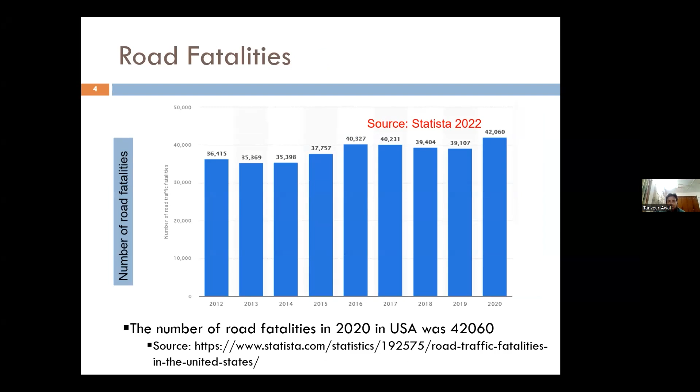The figure in the slide shows the number of road fatalities in the USA from 2012 to 2020. For example, the number of road fatalities in 2020 in the USA was 42,060. Now I shall present some relevant statistics in case of Bangladesh. Due to traffic jams, around 19 million working hours are being lost daily in Bangladesh. 6 to 10% of the country's GDP is lost every year. The number of road fatalities in January 2023 in Bangladesh was 333 in 322 accidents.

A potential solution for traffic congestion and road fatalities is intelligent transport systems with autonomous vehicles. The goal is to attain efficient and safe road traffic, as well as achieving comfort of the passengers. Important aspects related to ITS are car following, lane changing, merging, etc., and fault tolerance.

Now, some background of car following models. Most of the car following models assume that the dynamics of the follower N is controlled exclusively by the dynamics of the leading vehicle N-1. The most significant variables in the description of vehicle dynamics are leader speed, follower speed, and gap.

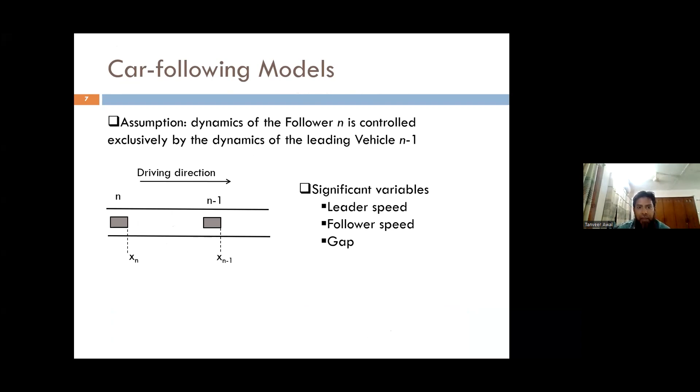Now I shall present the applications of car following models. Car following models can be used to control the real-time longitudinal interaction among driverless vehicles. They are used in advanced vehicle control and safety systems, such as adaptive cruise control, collision warning, and lane guidance, and in modeling simulation of safety studies and capacity analysis.

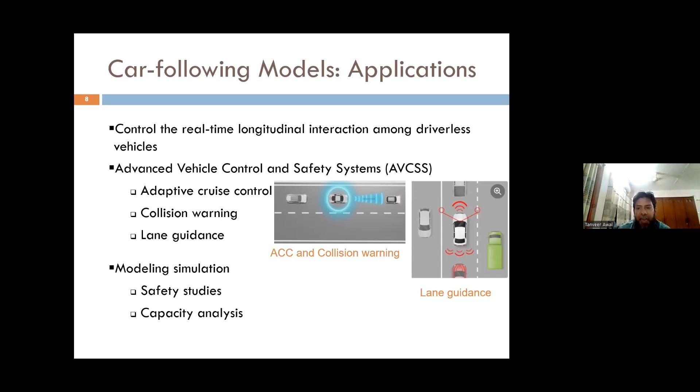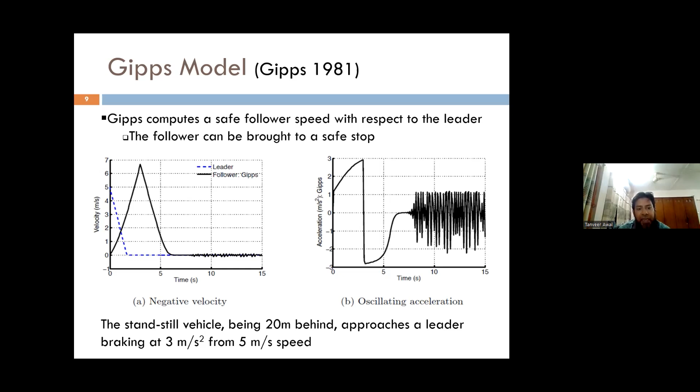Gipps model, proposed by Gipps in 1981, computes a safe follower speed with respect to the leader, assuming that the follower can be brought to a safe stop if the leader comes to a sudden stop. However, this model produces negative velocity and oscillating acceleration, as shown in the figure in the slides. For example, in the scenario where the standstill vehicle being 20 meters behind approaches the leader braking at 3 meters per second square from 5 meters per second speed.

Intelligent driver model IDM assumes that the follower acceleration is a function of own velocity, gap, and approach rate. However, IDM also produces negative velocity. For example, IDM shows unrealistic negative velocities where the standstill vehicle being 20 meters behind approaches a leader at rest.

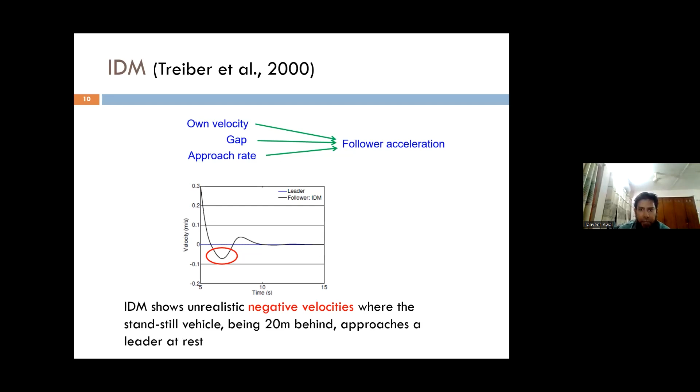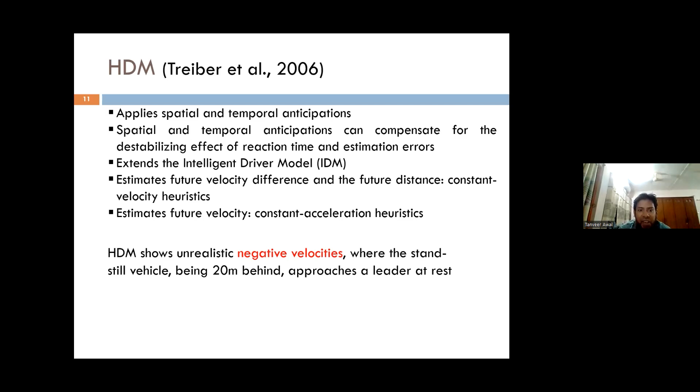Now I shall present human driver model HDM. HDM applies spatial and temporal anticipations, which can compensate for the destabilizing effect of reaction time and estimation errors. It extends the intelligent driver model, and estimates future velocity difference and the future distance assuming constant velocity heuristics. It estimates future velocity assuming constant acceleration heuristics. However, HDM shows unrealistic negative velocities when the standstill vehicle being 20 meters behind approaches a leader at rest.

Now I shall present space-based models SBM proposed by Bevrani et al. Under a certain short distance, the driver feels unsafe and tries to avoid collision. In further distances, the driver tries to achieve a similar speed to the leader up to the parallel adaptation distance. Beyond the parallel adaptation distance, in the attraction zone, the driver tries to catch up with the leader with the desired speed.

Now I shall present the motivations. Car following models depend on sensor measured values. In reality, sensor measurements are inaccurate and erroneous. For example, GPS receiver errors occur due to signal blockage and multipath effect. Radar sensor errors occur due to hardware malfunctions, road curves, grades, etc.

Radar sensor error has an error value in the range plus minus 0.38 meter. Global positioning system GPS receivers have a position error in the range of plus minus 10 meter. However, there is no research work that conducts fault tolerance analysis of the car following models in presence of sensor errors.

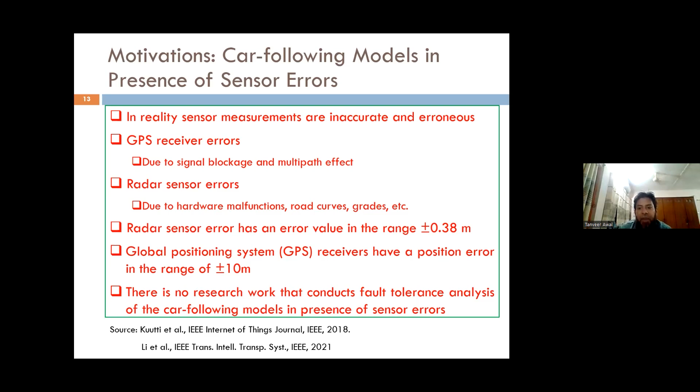Now I shall present the objectives and outcomes of my PhD. The first objective is to conduct a fault tolerance analysis of car following models for communication enabled autonomous vehicles under imperfect sensor information. The outcome is a quantitative fault tolerance analysis of car following models for communication enabled autonomous vehicles.

The second objective is to develop a methodology for escalating fault tolerance level of a prominent car following model for communication enabled autonomous vehicles. The outcome is a new methodology for escalating fault tolerance level of a prominent car following model KFTM for communication enabled autonomous vehicles.

The third objective is to simulate and evaluate the performance of the developed fault tolerant car following model for communication enabled autonomous vehicles in the presence of imperfect sensor information. The outcomes are simulation and evaluation of the performance of the developed fault tolerant car following model for communication enabled autonomous vehicles.

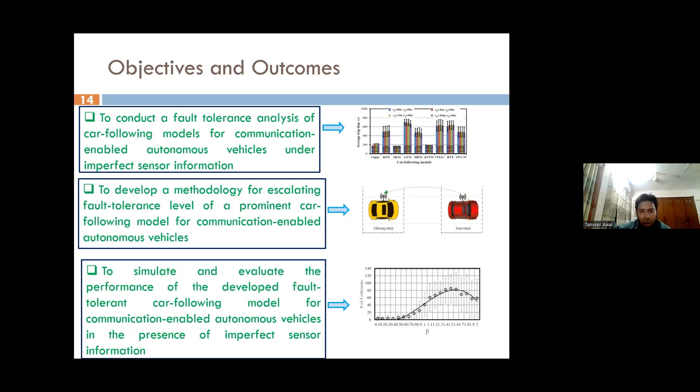The fourth objective is to develop model agnostic strategies for escalating fault tolerance levels of car following models for communication enabled autonomous vehicles. The outcomes are fault tolerant model agnostic strategies for escalating fault tolerance levels of car following models for communication enabled autonomous vehicles.

The fifth and final objective is to simulate and evaluate the performance of the developed model agnostic fault tolerance strategies of car following models for communication enabled autonomous vehicles in the presence of imperfect sensor information. The outcomes are simulation and evaluation of the performance of the developed model agnostic fault tolerance strategies of car following models for communication enabled autonomous vehicles.

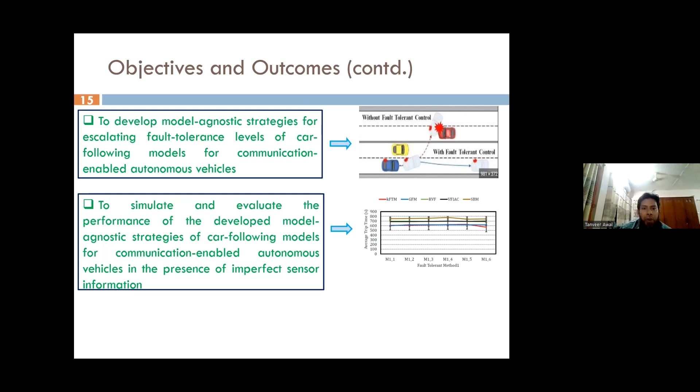In relation to our objective one, the car following models that we work with are as follows. We work with 9 car following models: Gipps model, Krauss model SKM, generalized force model GFM, intelligent driver model IDM, human driver model HDM, K leader fuel efficient traffic model KFTM, velocity fluctuation of the immediately ahead car VFIAC model, relative velocity fluctuation RVF model, optimal velocity changes with memory OVCM model.

Now I shall present the simulation setup in relation to objective one. The acceleration decelerations of the models are kept similar. The simulations are open system. Update time interval is 0.1 second. Inflow at the upstream boundary is either Poisson distributed or constant over time. Simulation length is 1200 seconds. Road length is 4 kilometers. We have implemented virtual detectors at the traffic light. Signal period is 40 seconds.

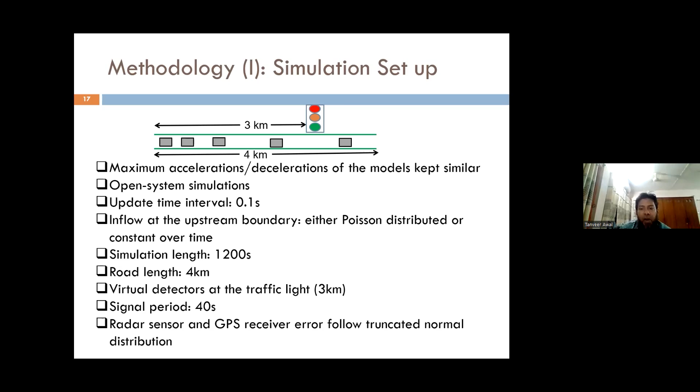Radar sensor and GPS receiver error follow truncated normal distribution. In our simulations, we use a part of a real highway map from Dhaka to Mymensingh. The distance between source and destination is 4 kilometers. The performance measures are safety, average trip time, number of cars finishing trips, average fuel consumption.

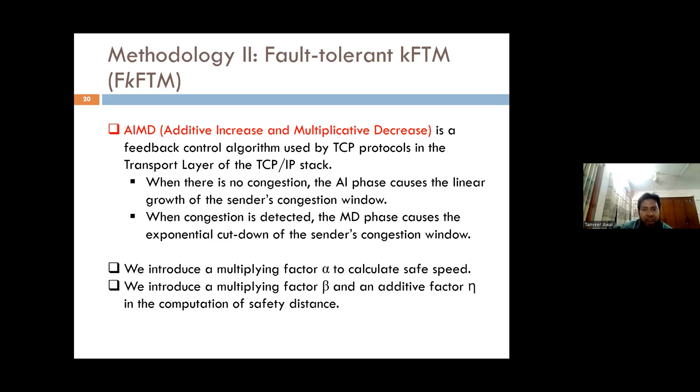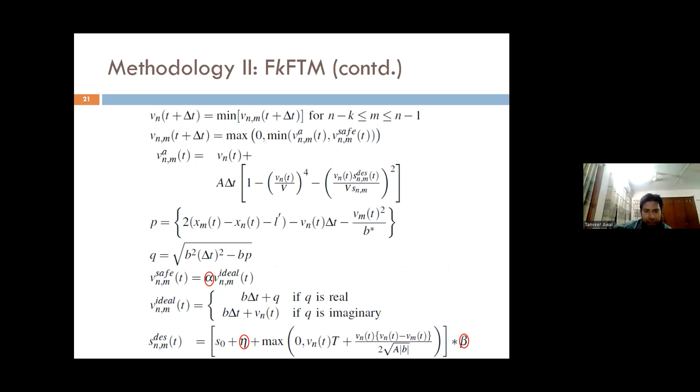We shall now propose a fault-tolerant car following model FKFTM based on KFTM. Inspired by the AIMD, additive increase and multiplicative decrease algorithm, we introduce a multiplying factor alpha to calculate safe speed in KFTM. We introduce a multiplying factor beta and an additive factor eta in the computation of safety distance. The formulation of fault-tolerant KFTM or FKFTM is shown in the slide. The introduced additive and multiplicative factors are circled in red in the slide. Alpha, beta, and eta.

Now the simulation setup in relation to objective 3. Simulations are open system. Update time interval is 0.1 second. Inflow at the upstream boundary is constant over time. We have also employed Poisson distribution, but for Poisson distribution there are no collisions. Hence we deal with only constant inflow at the upstream boundary. Simulation length is 1200 seconds. Road length is 4 kilometers. Signal period is 40 seconds.

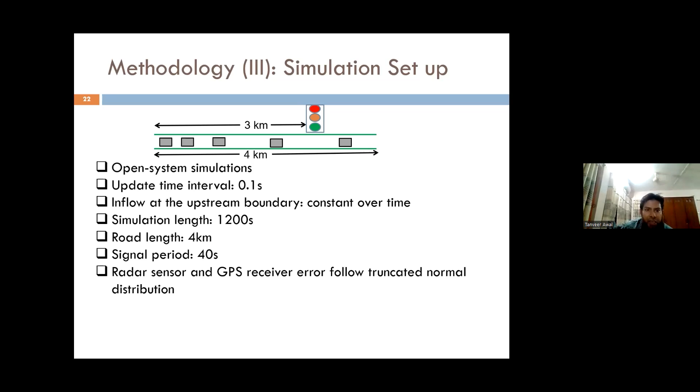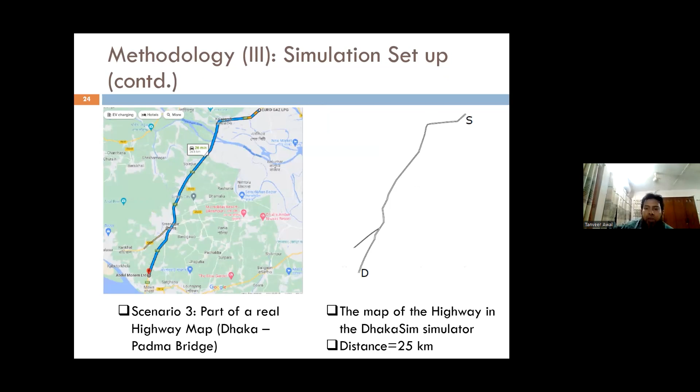Radar sensor and GPS receiver error follow truncated normal distribution. In our simulations, we use part of a real highway map from Dhaka to Mymensingh. The distance between source and destination is 4 kilometers. We also use in our simulations a part of a real highway map from Dhaka to Padma Bridge. The distance between source and destination is 25 kilometers in this case. For the simulation, the performance measures are safety, number of collisions, average trip time, number of cars finishing trips, average fuel consumption.

I shall now present the fault-tolerant strategies for car following models. Because the proposed FKFTM cannot nullify number of collisions, we propose 3 fault-tolerant strategies. Strategy 1 is fault tolerance through multiple sensor readings. The readings containing the safest GPS and radar sensor values will be used.

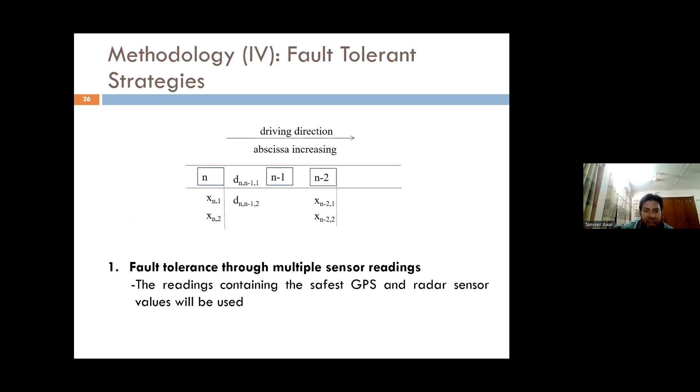Strategy 2 is fault tolerance through range of sensor errors. We have used different percentages of the maximum positional and gap errors in the calculation of the gap between adjacent vehicles. Strategy 3 is fault tolerance through multiple sensor readings and range of sensor errors. Both multiple sensor readings and percentages of the error ranges will be blended together in determining the gap between adjacent vehicles.

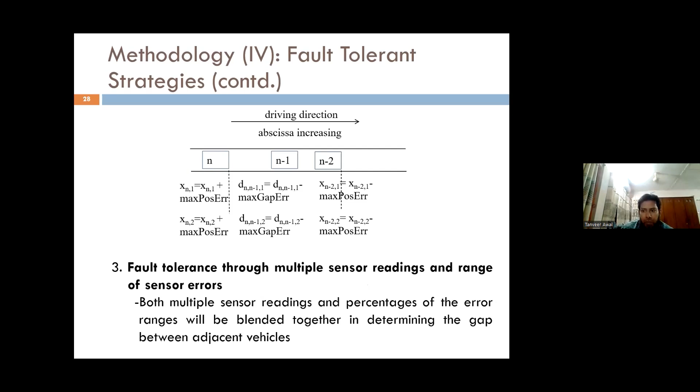In relation to method in our objective 5, we have worked with 5 car following models. They are generalized force model GFM, K-liter fuel efficient traffic model KFTM, velocity fluctuation of the immediately ahead car VFIAC model, relative velocity fluctuation RVF model, and space-based model SBM. The performance measures in this case are safety, number of collisions, average trip time, number of cars finishing trips, and average fuel consumption.

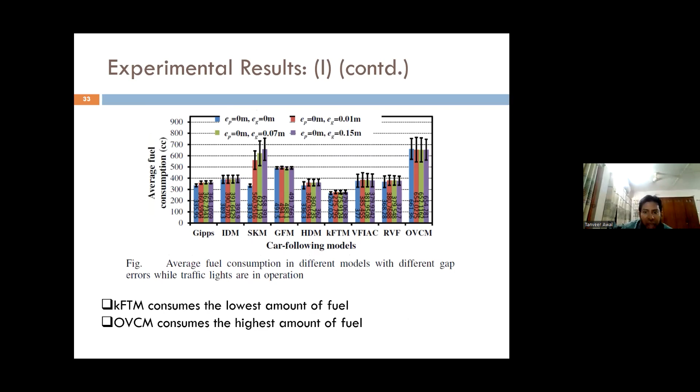The figure in the slide shows average fuel consumption in different models with different gap errors while traffic lights are in operation. KFTM consumes the lowest amount of fuel. OVCM consumes the highest amount of fuel.

Now I shall summarize the experimental results. Gipps, IDM, HDM, GFM, VFIAC, RVF, and OVCM can produce negative velocity. With traffic lights, sensor errors increase trip times and fuel consumption in Gipps, SKM, HDM, VFIAC, and RVF, while they have almost no impact on trip times in KFTM. KFTM is the most fault-tolerant model among the models under study.

None of the models is highly fault-tolerant. All models produce traffic light violations and collisions when traffic lights are in operation because they do not adopt any measure for fault-tolerant operations.

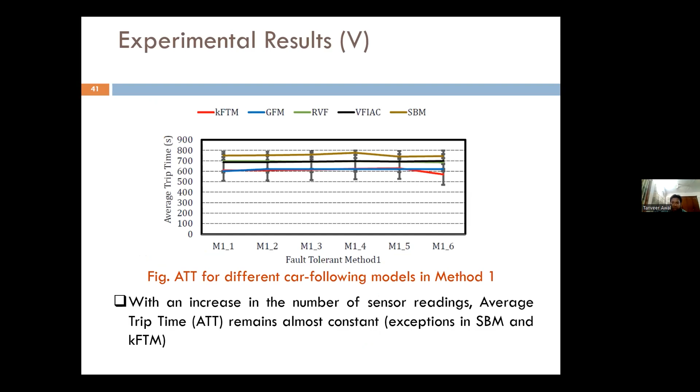Now we shall present the experimental results in relation to our objective 5. The figure in the slide shows average trip time for different car following models in method 1. With an increase in the number of sensor readings, average trip time remains almost constant. However, there are exceptions in SBM and KFTM.

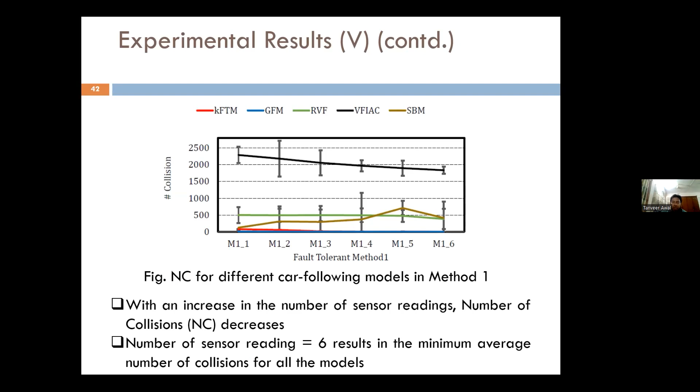The figure in the slide shows number of collisions for different car following models in method 1. With an increase in the number of sensor readings, number of collisions decreases. Number of sensor readings equal to 6 results in the minimum average number of collisions for all the models.

I shall now conclude with the contributions in this thesis. We have done a fault tolerance analysis of car following models for communication-enabled autonomous vehicles. We have proposed a new methodology for escalating fault tolerance level of a prominent car following model KFTM for communication-enabled autonomous vehicles. We have proposed new model agnostic strategies to escalate fault tolerance levels of car following models for communication-enabled autonomous vehicles. These are the contributions.